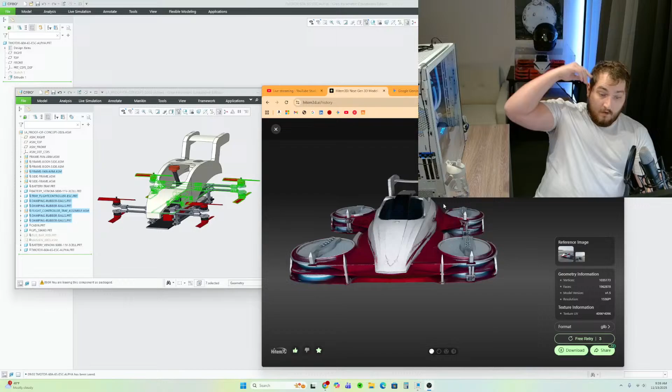I'm back. I'm just gonna check if the sound's good, because right now it looks like it's too loud. But let me just make sure the stream's good before I start talking. See, I got the live stream on my phone. Alright, perfect. Alright, sound looks good.

Let's get started. I'm CADing today. I was developing in my previous streams, but I decided that I want to. Well, I should backtrack because I started going to a hackerspace in New Jersey, and I brought motors, which I'll show you. Hold on one sec. They're big. Hold on.

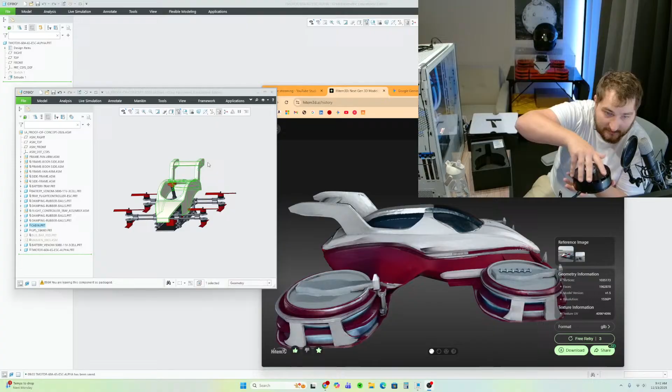Okay, so you power them here with a 3-phase PWM controller, which is what the ESCs are, through a flight controller, which is this right here, this flight controller. But this is a small scale. We're building it small first to make sure that what I'm trying to do works on a small scale before we scale up. But in the future, we will be building this in a human flight capacity. So let me just put this away.

Okay, so that's kind of the backstory. I've been going to a hackerspace. I told them, hey, like, can I build the large scale here? And they were like, yeah, absolutely, it's gonna cost like $110 a month to keep the lights on, which is better than paying for like a $300,000 facility on my own. I could just share it, and it's like a business there, so they make money and they're able to pay for the building. This is kind of the stuff I think about. I know it's probably not interesting to you, but

I was like, can I build it here? And they were like, it's up to you if you want to start right away, or if you want to build like a small scale version to demonstrate that it works to investors, so that we can get like grants from the state to sort of fund the project. Like I have $20,000 worth of components, but we still need the frame, the batteries, and the frame and batteries alone are probably in the range of $10,000, I would say, maybe a little bit more.

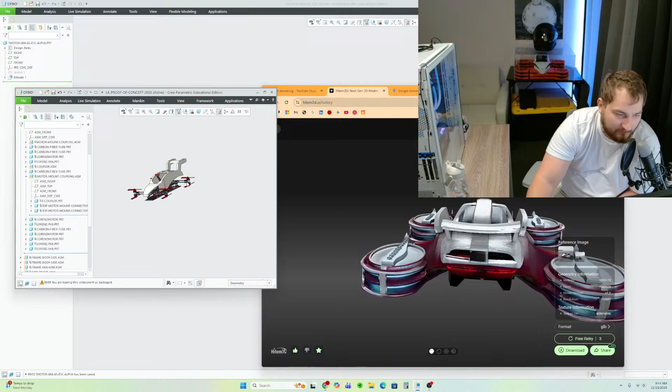Depending on how we make these parts right here, this for example, if you run this through a milling process like PCBWay, they'd probably charge you like $300 or more just to make this part. And I have a lot of those parts. As you can see, this frame is made up mostly of those parts. So if we get the materials on our own and like buy a CNC machine that the state funds through the grant, I don't know how much CNC machines cost actually. I should probably look into that. How much does an aluminum CNC machine cost? This is probably something I should know. Isn't it great? Like, AI can just...

The cost of a CNC machine varies dramatically, ranging from a few hundred for a hobbyist desktop model to $500,000 for a high production industrial machine. The price depends on the machine's size, rigidity, precision, and features. Here's a general breakdown of what you can expect at different price points. Okay. I would say between like a desktop CNC and entry-level industrial. 4x8 foot CNC routers with enough power and rigidity to handle aluminum sheet production. Prosumer or desktop mill range.

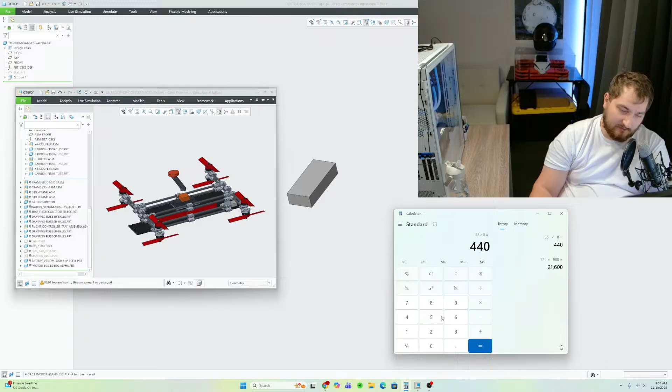So yeah, let's work on it, because there's a few things that I need to do. For example, I figured out that I need 2 batteries because there's 8 motors, and each motor has a peak current of 55 amps. So 55 times 8, 440 amps. So one battery can't contribute all of that necessary power. There would be a voltage lag, and Aeroboticar's small scale prototype will fall out of the sky if I use one battery. So divide that by 2 batteries running it as 2 separate systems, so it's a redundant power system.

So this battery right here will be powering these 4, this motor, this motor, this motor, and this motor on this side. And then this battery, actually, now that I think about it, it can't be like that. It has to be, this battery powers the bottom ones, and this battery powers the top ones. This way, if one battery fails, the drone won't fall out of the sky. It will still have 4 of its motors working.

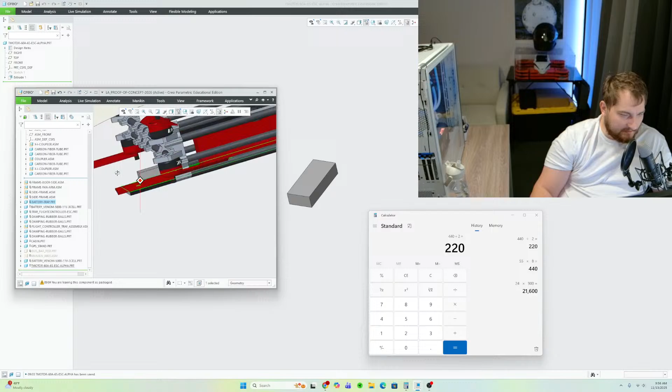So the problem right now is space, because as you can see, I can't really go out any further with this battery tray without it looking stupid, and I do want to make it aesthetically pleasing for investors. So what I'm gonna have to do is, I could probably move this in a tiny bit further. Okay. From the battery, distance, how far should it be?

Oh, I'm lagging. I wonder if it's because I'm streaming.

I wonder if it's because I'm streaming. Yeah, it's because I'm streaming. I'm like lagging a little bit.

I think that's inches. I could probably keep it tight because I'm gonna need bus bars here. So keep it tight, keep it right. And then from the center, I want to make sure that they don't overheat or anything. You know, they need some breathing room. Keep it tight, keep it right.

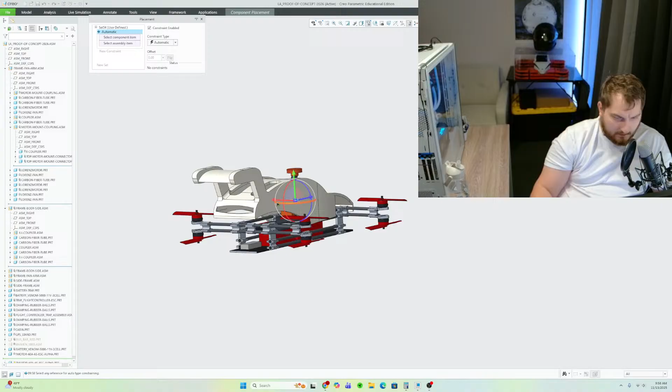So this is the flying car, huh? Yep, this is it. This is the flying car right here. I've been working on this for 7 years to finally get something to fly, with the goal of making a full-scale prototype. And this scales up to human scale. So this is something that I'm very, very proud of.

Normal. No, not normal. Sorry. Come back. Distance. Keep it right, keep it tight. Alright. 0.4. Okay. And this gets... So right now I'm just constraining. I don't think it's registering that I'm trying to constrain it on the ground here. There you go. Okay, now it's fully constrained.

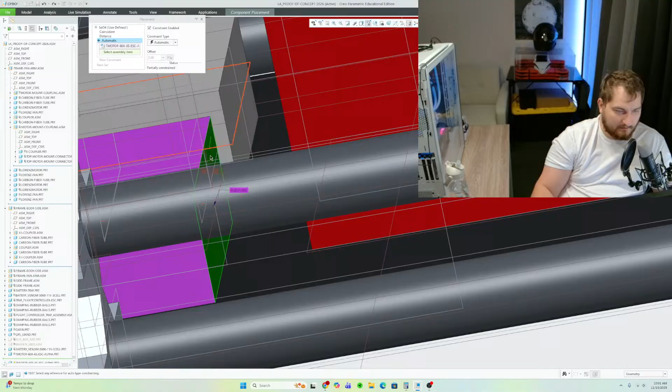0.4. For some reason it's not... maybe I shouldn't constrain it with respect to the other ESC. I should do it with respect to the same thing I did with the first one. Okay, so now there's just one vector left, and I think I did it with respect to the battery. I think I did like 0.5 inches from the battery.

But it's not constraining it. The blue line should go away, the blue vector. But it's not. And this whole thing should turn orange. Maybe if I do it with respect to that. No. Alright, well, that'll have to do. It's not working. But that kind of demonstrates how it's going to look. And then wires will be coming out of here, and the battery will also have wires coming out of it. So there's going to be 8 ESCs total.

This is just the engineering process. It's very meticulous, sort of. There's no real calculations that I've had to do. You haven't seen me model anything so far. I'm just kind of assembling things, but see how it's orange? Oops. Keep it right, keep it tight. So that's perfect, actually. That's really good news, because now I can create a sort of platform for the ESCs with some breathing room. They might get hot in here, not gonna lie.

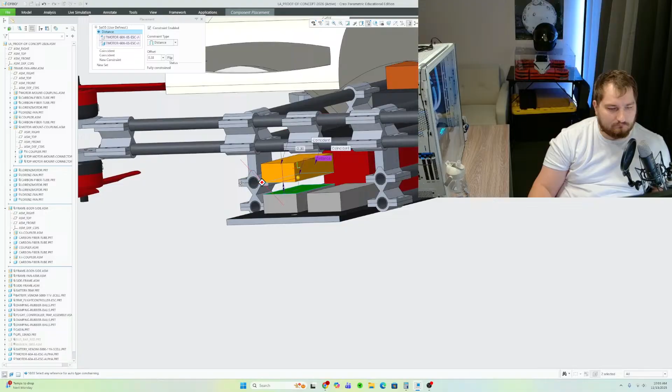So a lot of electrical noise going on in here, but these are D-shot ESCs. I'll show you the ESCs. I don't think I've shown you those yet. T-Motor Alpha 80 amp ESC. These ones right here. 6S. So this is going to be like a $500 expense because I need 8 of them. So $559 that I'm going to spend on ESCs. But these are it. And this is how I got the dimensions. They literally give them to you.

Lightweight design on the promise of waterproof, dust resistant, and cooling performance. Lighter than square wave ESC of the same size. Alpha ESC is 15%. Okay, cooling performance. So these are probably going to be okay because they're very efficient, low temperature. So I don't think I really have to worry too much about them overheating or anything like that.

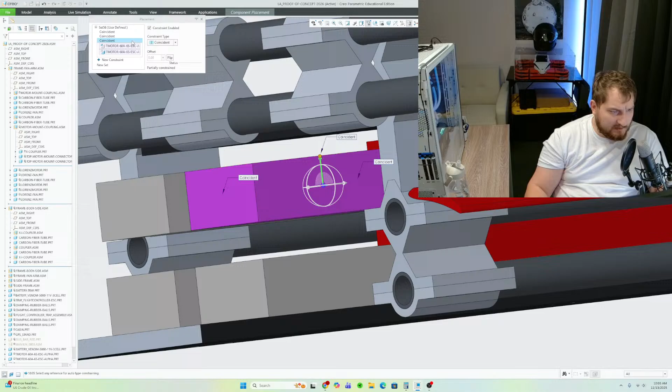So 3D CAD is kind of like creating the Lego manual, if you've ever played with Legos. See, sometimes it constrains and other times it doesn't, which I don't know why. There you go. Distance 0.4. Perfect. The bus bars will have to fit right here. I have to create a bus bar. But yeah, I got super lucky with the dimensions. I literally want these dimensions, and the ESCs just so happen to fit. And then I need bus bars as well.

So this little hole right here. So a bus bar looks like this. You could plug power onto this, and it's like a rail for your electronic speed controller. This is the positive one. There's also a black one that I was gonna put on the back. That's the negative terminal. And this took up a lot of space. So instead of having 4 individual poles, I'm going to create one pole.

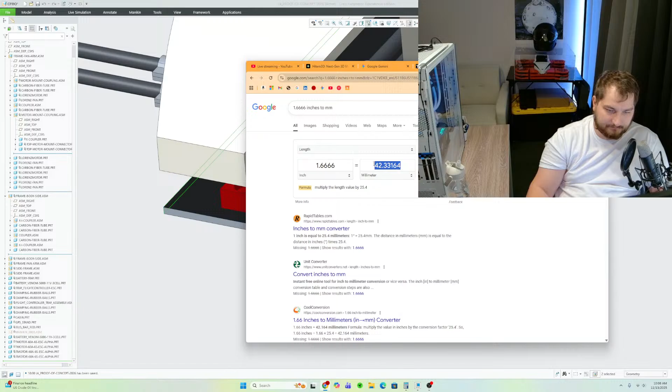Actually, 42 is the meaning of life. If you guys didn't know, if you've ever seen Hitchhiker's Guide to the Galaxy, 42 is the meaning of life.

So let's do 42. 42 divided by 2. And then we can get rid of these right here. Actually, yeah, we can. Okay, delete that. We can delete this. So now we're just left with this little thing. So we're gonna need to put an M8 bolt through it.

So I like to start off very crude and rudimentary. So for example, what is the size of an M8 screw? That's what I need to know. M8 bolt size chart. The diameter of an M8 is 8 millimeters, and a standard or coarse thread pitch. 8 indicates the nominal diameter. Okay, so it's 8. That's why it's 8. M8, 8 millimeters. So we're going to need about 8.2 just to make it fit.

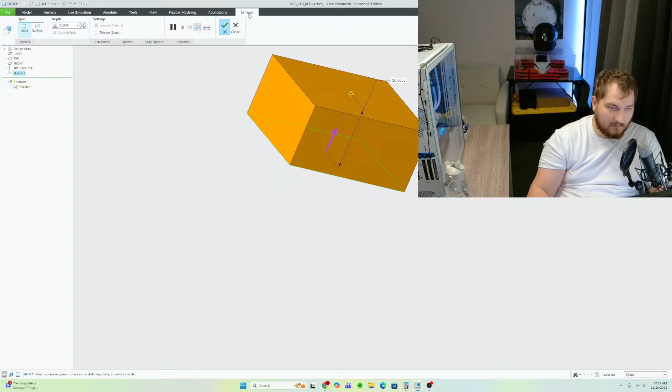And then you kind of just extrude it, remove material, and that's sort of the compartment for it. 10 is probably plenty of room. And then I'm just going to move this up a little bit, maybe 20. Okay. So the bolt will go in here. Let's model a bolt.

M8 bolt. Illegal characters. Inches part solid ABS. So this bolt will be, I don't actually know what size bolt, like how big the head is. Let's call it that big.

So this is gonna be 8. Let's do 8.1 just for tolerance purposes. And this is the fun part, because we need to figure out how much space we have under there. I'm guessing we probably have around 40. Save it, and then we can make it copper. Copper right here. So it's gonna look copper.

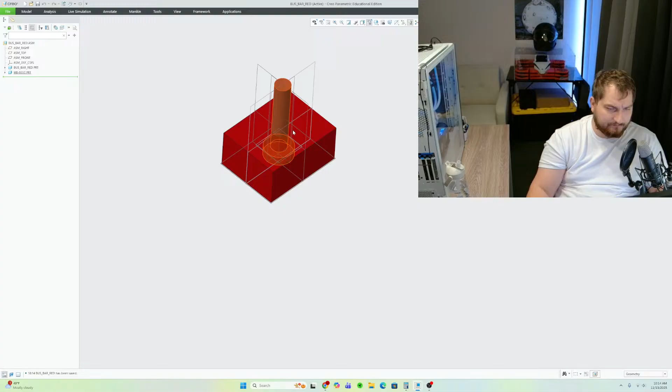So let's go back to our Aeroboticar. And now let's add the, what did I call it? Bus bar red assembly. And then put it over here. Okay. Oh, okay. I think 40 might be the limit. 40 might be actually the limit. We could delete this. That's just the base of the bus bar.

So as you can see, we could probably take this and make this like 14. And I'm just making sure that, so I want to give it space, right? I want to make sure that the distance from the head of the copper bolt to the bottom of the container, I shouldn't have named it container, but so that it's not touching the ground. Okay. And we can paint this red. Okay.

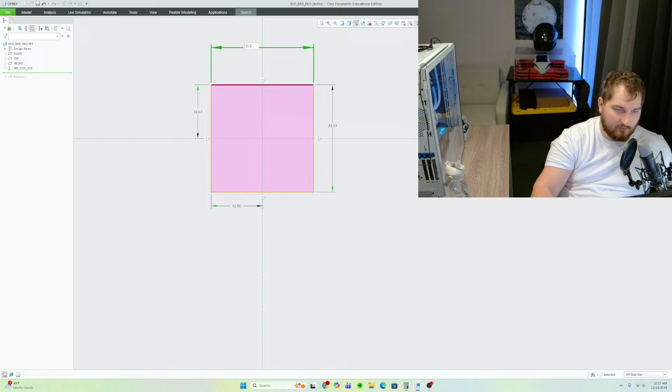This is going to be 3D printed in ABS plastic. So now we can take this and create holes for, I'm going to say M2. M2 screws can hold this for sure. And I think I'm going to make this square, because right now it's 42 by 33. You know what? We could probably get away with 33. 33.333 divided by 2. Okay. So it makes it more compact.

And then we're going to need screw holes on this. So let's see here. How can we do this? Just outlining the circle. We could probably put a hole right there. So this hole is gonna have to be about 4. Actually, no. An M2 screw is 2.2. Okay. So this is going to be mounted onto the battery tray. So we can do that.

Put a hole through it. And then mirror this. And then mirror these two over that. So now we have 4 holes. And this is going to be mounted from the top. I believe it's going to be mounted from the top.

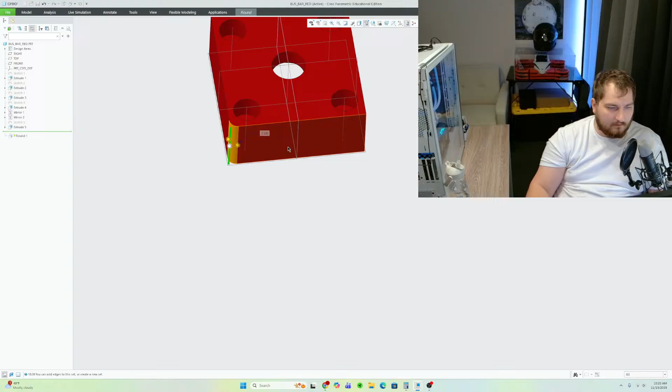Paint it red. Okay. So now you have your bus bar. And we can get rid of these sharp edges. Like that. And the 3D printer will take care of the rest. There's your bus bar mount. Bus bar red. Okay. And then let's make sure that it fits. See, we made it a little bit smaller. Okay.

We could probably get away with just screwing in 2. You know, I made 4, but I'm thinking now we could probably get away with, I think 4 might be too much. Yeah, I think we could do 2. Because then I'm going to be sitting there screwing all of it in, you know. Actually, we can't do 2. We can do like a diagonal situation. I'll just leave it as is, and then when it comes to actually assembling it, I will only use 2 holes. This way, when it 3D prints, it will actually use less material, and it will look neater.

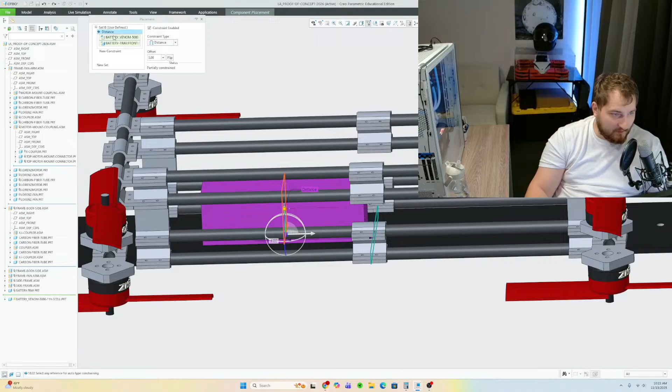Okay, so we got our bus bar. Actually, we should probably put this on the other side, over here. That's where our ESCs are. That's cutting it a little bit too close for my liking. Yeah, that's a little bit too close. However, I could probably get away with 2.5 here. Actually, no, not 2.5. 2.63. I'm just trying to make it so that... 2.69. The batteries will essentially have to be touching each other.

Pause. 2.69. No, that can't work. 3. 2.8. And let's try to do 2.8 here. Okay, so there's barely any room for the batteries to move around. They are going to be strapped in. Now, that doesn't really give me any room to play with here. I guess I could do a little bit. Actually, what's the distance? I could probably decrease the distance a little bit. Maybe like 0.2.

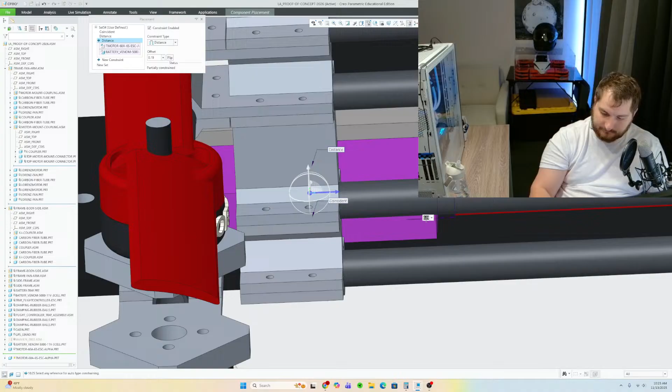And then I would have to... oh, this one came first. Point two. Okay. I don't think that's good either though, because there's wires coming out of here, you know? So they're going to be smushed up against this battery. So we kind of have to undo that and give it some room for wires to come out. 0.5 is fine. Why are these so far back? Distance 0.5. Okay.

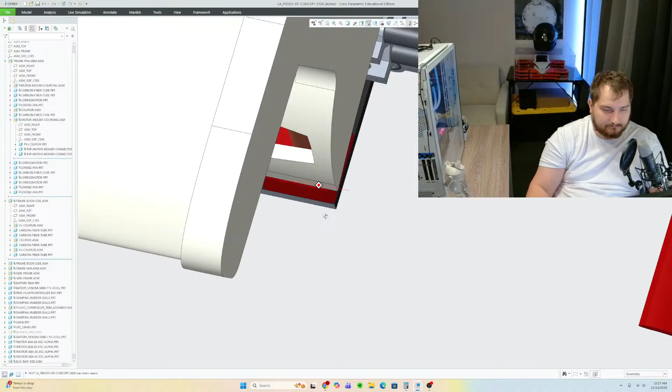The thing is, I think I'm gonna have to put this like on the edge here. I think if I put it on the edge, it should be okay. Oh, wait. If I put it right on the edge, like that, the wires should be able to breathe here a little bit. And these are power wires, so there's only 2 power wires coming out from here. And they should be able to sort of come out and breathe. Okay. So now we need to make holes for this thing. So from here to here is how much? 0.18361.

You know what? I could probably copy and paste. If I take this and take this guy, put center line, put whatever those are, go like that. C, copy, go onto the battery tray and paste it right here. Ratio is 1. The thing is, I don't know. I don't think that'll work actually. But you guys get what I'm trying to do, right?

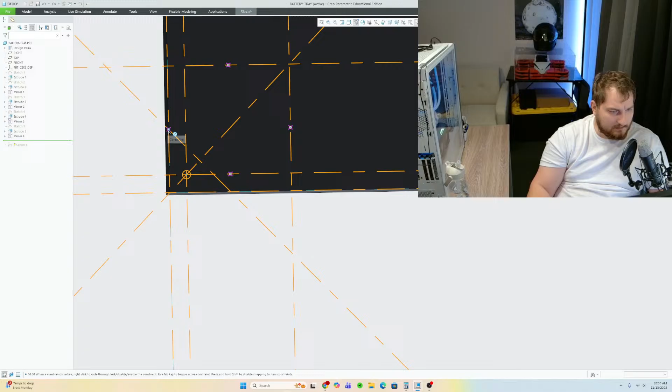If I take from here to the edge, you know what, if I do this, create these lines. I wonder if that will work. Paste. And now this gap right here, I wonder what will happen. Oh, that actually worked. Let's go. Nice. So that will be sort of the holes for the screws. And then I'm gonna need to copy these holes. I believe that's the center line. I don't think that is though. Huh.

I think I did this wrong. Hold on. Cancel. I think it's like that. Oh, so those are the center lines. Okay, so take this, mirror it over this. Take that, mirror it over that, and then take that and mirror it over that. And I believe that should be okay. Those will be the mounts for the... oh, and we need like screw hole little things for it. So like that and like that. Like that and like that.

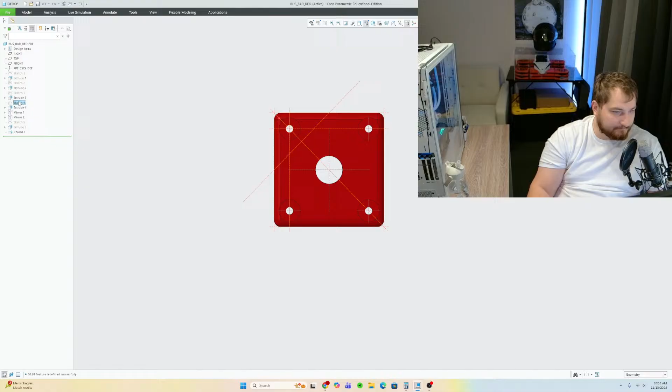This should be like, wait, why is this 2.3? It should be like 3 or maybe even 4, honestly. Let's do 3. And then remove material. These holes are too small though. You know what it is? I don't think I ratioed it when I pasted it. Yeah, I didn't ratio it. That's why they're so small. Okay, hold on. I forgot to ratio it. Remember when I did this whole thing? I forgot to make it 1:1 scale.

So let's go over where that is right now. So it's right here. Oh wait. See this? I didn't do that. From here to here should be 0, and from here to here should be 0. Okay, and then this and this are this, from here to here and from there to there.

Okay, so now we just have to mirror this again. And then mirror that over this and mirror that over this. Mirror. Okay. And then go like that. And there you go, there's your holes. So now here, yep, it's perfectly aligned.

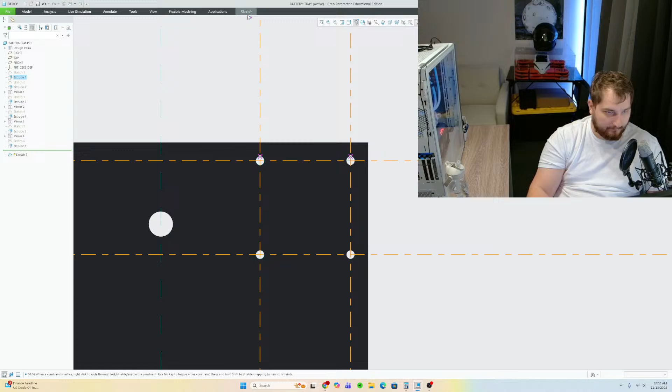We just have to create the little, you know what I'm talking about, the little, so that the screw's not sticking out, like a little compartment for the... probably like 5 is good. It's gonna be tight, but two. Get it right, get it tight. All right.

Now we can take this guy, and this guy, and mirror it over him. And now we have the same pattern over there, and then we can take this guy and mirror it over this guy. So now

I can take bus bar red assembly, take the axis of this little hole right here, constrain it onto the axis of this little thing. Coincident. Okay, and then constrain it like that. So now I have bus bars on either side, and I need black bus bars as well.

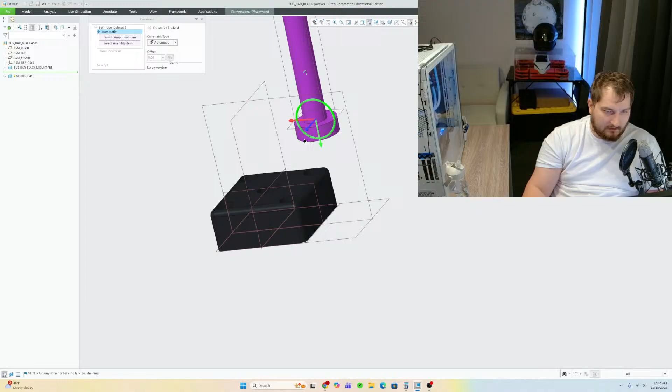Okay, and then we're gonna need our bolt, M8 bolt. I remember the name of this guy, which is upside down right now, so we have to spin it and then put this guy here on this axis. Coincident. And then coincident that again. Okay.

And then, actually I'm gonna need the axis, and then we're gonna need to put bus bar black, put this axis right here, coincident, and do this right here. Okay, so now we have two terminals.

Should negative be on the left or right with respect to the person looking at it? I mean, they're clearly labeled, right? You know what you could also do is get like a... I guess we'll worry about that later, but I'm gonna need to make a cover. Can you guys even see? Let me see. Yeah. I'm gonna need to make a cover for these so they're not just like sticking out.

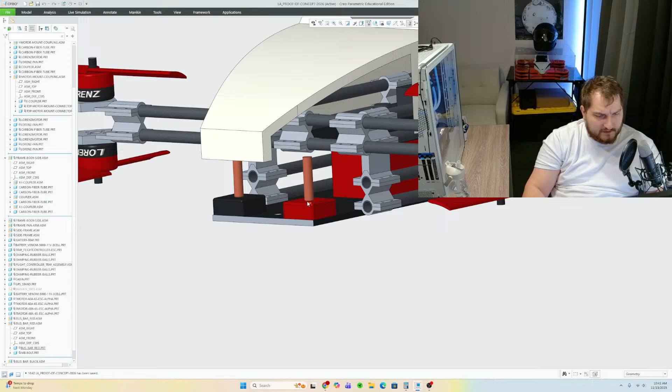But we can also make these bigger, I think. I'm not going to though, just in case I need to put something here. So that should be fine for all the 4 motors, which I'm gonna have to wire like a power cable through here. Okay, so that's what it looks like so far with the bus bars.

And I'm also gonna do like a shelf. I don't know how I'm gonna do that though, if that's gonna be a separate part that I'm gonna mount on, but I could probably... I'm thinking.

Oh, you know what I'm gonna need to do? I'm gonna need to create clamps for these ESCs. This guy does not have mounting holes that I can screw and hold on, so I'm gonna need to clamp it. I'm just thinking how I would do that. And then that clamp could be the shelf for the top one, which will also be a clamp. That's a good idea.

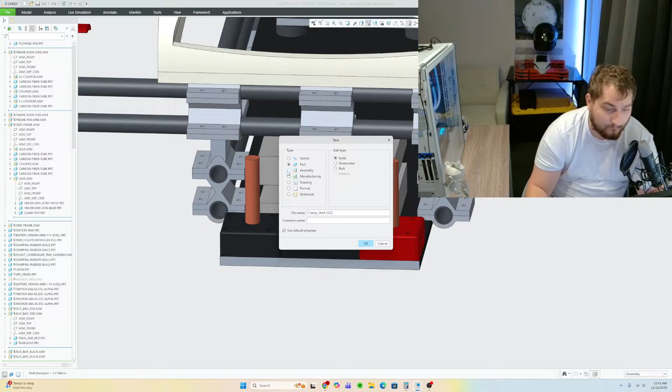So I'm gonna need to make a clamp shelf. Clamp shelf. Clamp shelf ESC part. Clamp shelf ESC Lorenz. Part solid ABS. Okay. So, like a clamp shelf type thing. So, we need a rectangle. Like this kind of. This is gonna be.

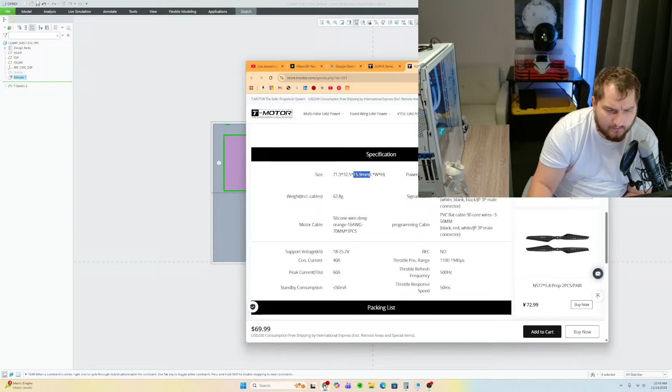Okay, save that. And now it's gonna look something like this. How big is the ESC again? 72. Wait. Oh, no, that's the width. Okay, hold on. 33. And then I'm going to center it. Okay. I'm gonna center it. Okay.

33 from here to here is 33 divided by 2. The height of this compartment is gonna be 16. And then from there to there, I think it's gonna be 2. From here to here should be 2. It is. Okay. Yeah. So, and then take this whole thing and mirror it on that, and then mirror those two over that. Okay. And these will kind of be like the clamp shelf situations. What color should I make it? Let's make it white.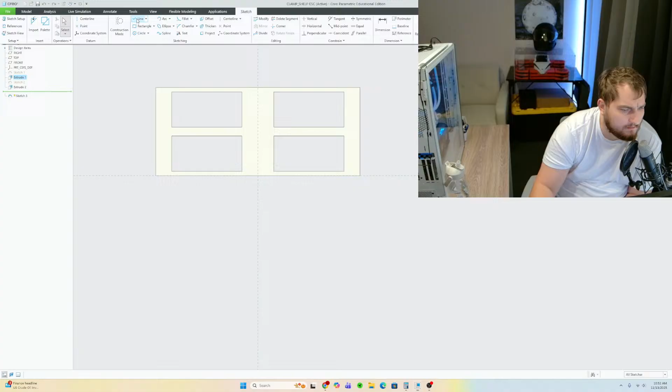Okay, so now, actually, we don't need this bottom part because that will be on the ground. Oops. So from here to here, here to here, here to here, and then like this. Why didn't that work? That's weird. I'm just gonna do it a different way. Do this. Do this. Okay, and then extrude.

Okay, so now that would kind of be your... This wall probably doesn't have to be that thick. So for this, from here to here is how much? 7.5. We need it to be 2. 7.5 minus 2 is 5.5. So from here to here plus 5.5. And then we could take this guy and make it like this too. No, actually, I think 2 should be enough. Okay, and then from here to here, here, pop.

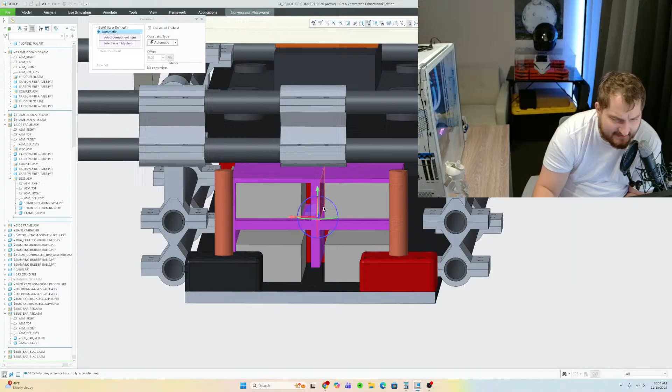Pause. Right here. Get it right, get it tight. Get it right, get it.

Okay. Well, that would be your ESC sort of shelf, like clamp situation. The good news is that it does fit. Now I'm gonna need to create like an assembly file for this. Because I'm gonna need to mount this thing onto this thing. So I'm gonna need to create like a little shelf so I can screw into, just like we did here with this thing. We're gonna need to make like a platform for the screws to go into. So let's start there.

So this guy could go like that. I'd say about 3.333333333, and then we just need it to be big enough. We also need it to fit. So the screw, I'm thinking like 8. Okay, so we're on this side. Okay, so that will fit. Thinking like 8 will fit. And then we're going to need, how many screws? How many screws do we need?

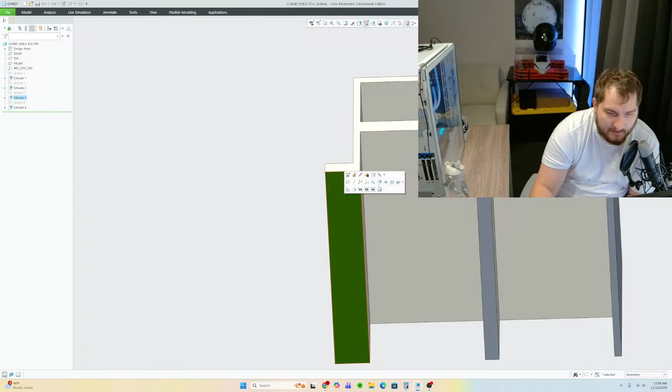Wait, what? Partially placed. You haven't specified enough references? What are you talking about? Can I put, or no? Section is incomplete for reasons listed in message area. What are you talking? This never happened to me before, ever in my life. Maybe I can't sketch on that. Maybe I can only sketch on this part. That's so stupid.

Maybe someone has evil eye towards me or something. I don't know.

Here's the center line. And then I'm thinking we probably only need 2 screws on each side, you know? So from here to here, I'm just finding the center line, which is this right here. And then it's going to be secured by M2 screws, so 2.2. And then the center line will be, yeah, and then mirror this. Mirror that here. Okay. Okay.

Then we could, why can I not sketch on this? You haven't specified enough references to place the section. Sketch anyway. Yes. To select the object, hold down Alt key. Can I sketch on this? Yes or no? I'm so confused. This has to be like 5 or so. Oh, I can sketch on it. Okay. That was weird. I've never had that happen before.

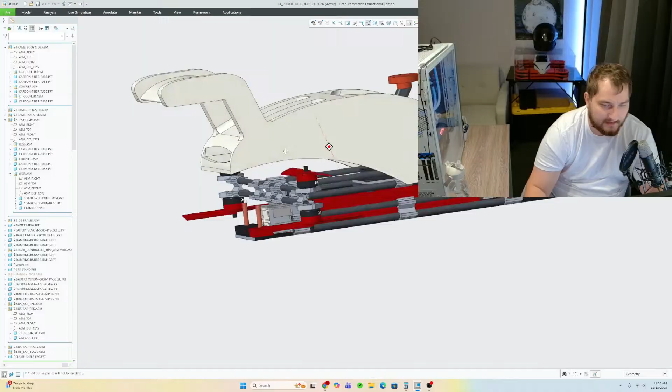Mirror this entire thing over here. Let's see if that fits. I'm getting so lucky with these dimensions, bro, because I already did the cabin, which I just realized needs a window. Actually, does it need a window? This one doesn't have a window. Yeah, I guess it looks fine how it is. But it should have a window, bro. I feel like it should have a window. Hold on. I'm getting off on a tangent, but this needs a window.

Let's get some dimensions going here. Oh, nice. Okay. Oh, wait. Spline. Okay. Get it right. Get it right. Something like that. That's a pretty good window. Pretty good window, right, guys? And then just remove material.

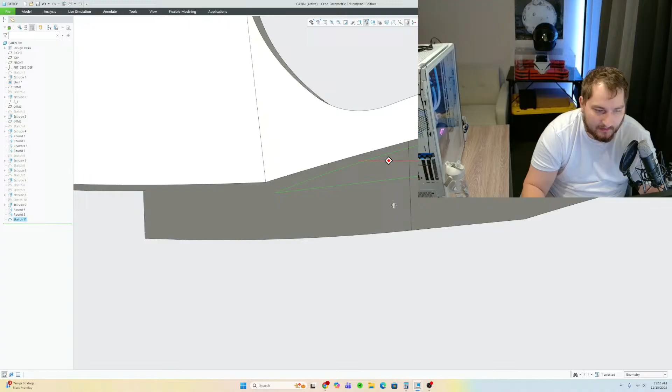Wait, what? What? What? Why is it creating like a wall? What are you guys doing to my application with your evil eye, bro? You know what it is? I think it's because this guy... Oh, I know what it is. I think... Let's do symmetry, remove material. Huh, that didn't work. I wonder why it's doing that. That's strange. Is it because this is not a flat surface?

Let's take this guy. Oh wait, no. Take this, copy. Let's put it on the center. And now we should be able to extrude the material. Why is it doing that, bro? I'm gonna try one more thing. If this doesn't work, I don't know what will.

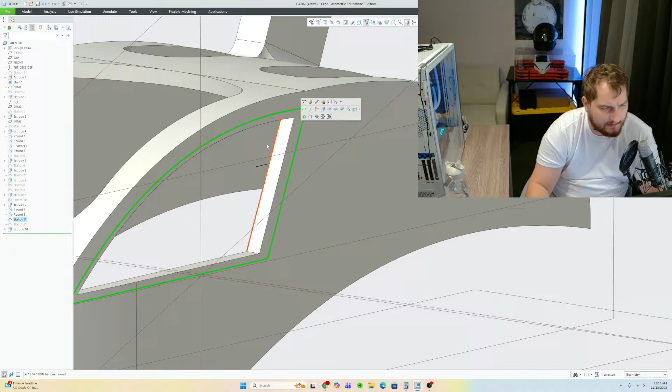Let's do 0.8, or no, 0.9. Paste, sketch, remove. There we go. There we go. Windows. Oh, no, not gray. White. I'm making it white because that's the printer filament I have. So now it has windows. Okay.

Okay, so now back to the clamping situation. The clamping situation. Let's see. Okay, that fits. And then this piece right here will clamp the bottom two. And then this top piece right here is going to need to clamp down onto something as well. So this part down here is going to need to be rigid. Same idea as here. So they're going to be, I don't know if that's a good design though, because it's kind of holding itself against. I'm thinking we could probably get it right, get it tight, you know what I mean?

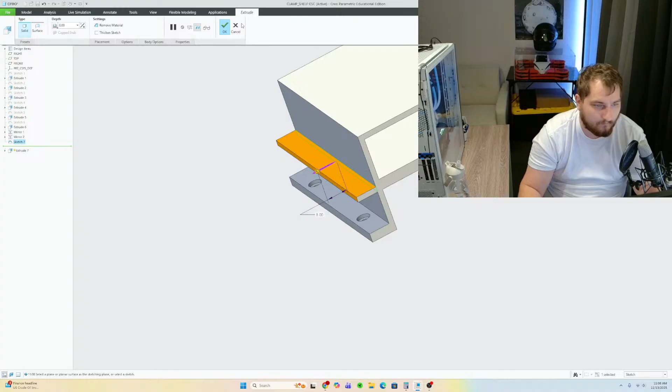So this was 8, and then I'm gonna need to create like a little structural support here. It just needs to be like 10. Actually, no, probably 20. Okay. So see there, it will be like a little. This is probably way too thick though, because that's gonna take forever to print. 8 in thick. You could probably do 8 and then create like a cutout. Like that. About 2. I would say 2 or 3. Maybe 3. And then cut out like that. And we could probably get away with that.

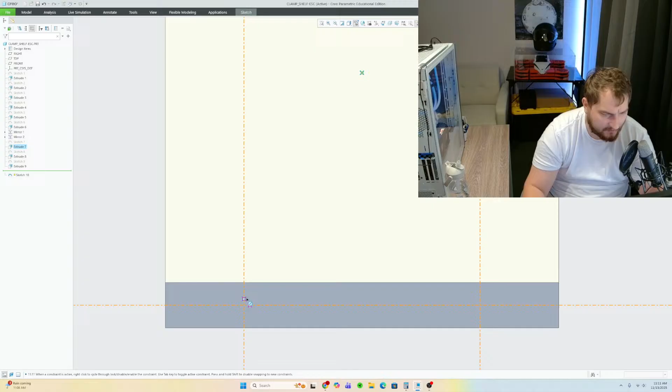Okay. And so this way you're not printing too much, you know? You gotta save some space so you can make holes in certain places that won't ruin the design or anything like that. But this should probably be like 1. Okay. And then if we print on top of that, we could find the holes that we already made, which is this one right here, and create the same holes for those. So that would be sort of the platform for this guy.

So let's copy all that. Over here. Mirror it. Does that still fit? It should, yeah. Okay. And now we're gonna need to make 2 separate pieces. So this is a clamp shelf ESC bottom. So let's save as a copy. Clamp shelf ESC top. Open clamp shelf ESC top. And then

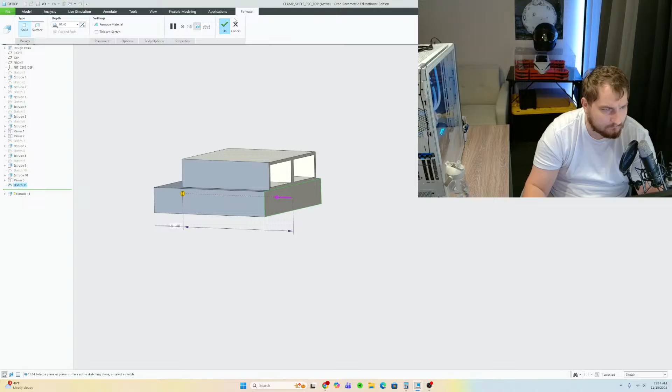so we can get rid of all of this. Actually, if I get rid of that, I'm gonna have to redo. Yeah. Gonna have to get rid of all of this, as well as this right here.

Keeping this right here, I think. Actually, I think we need to get rid of this, not keep that. Okay. Get rid of that, get rid of that. Delete. Okay, so that'll be the top, and then we can make an assembly called ESC clamp shelf.

And then we're gonna have to model clamp shelf, ESC clamp shelf. This guy. And then these will be two separate pieces. Okay. Clamp shelf, ESC top. So that'll be the top of it. I just need to fix this up real quick.

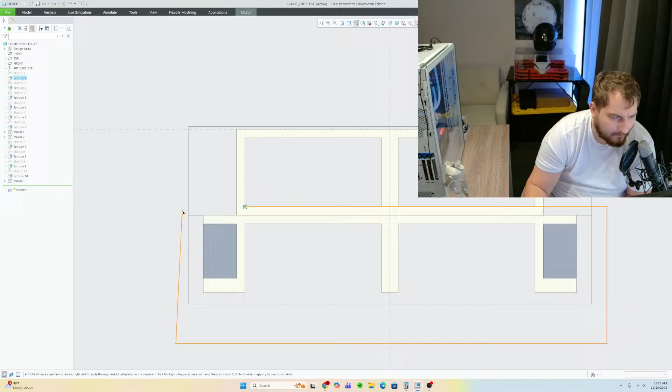Okay, so we're getting rid of, well, this whole top part. This whole top part is getting deleted. Oh wait, top part, not bottom part. So, okay. Actually, hold on. We could probably get away with making this thinner. Like that.

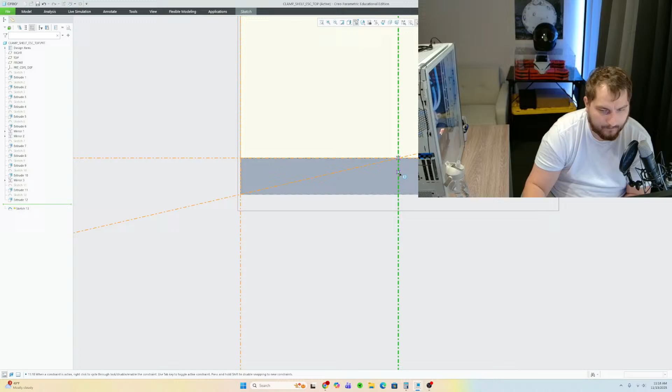Okay. So these will hold the bottom two ones. They'll clamp them down. And then this guy will be clamped. So we need to make a, like this. Two. And then just like before, why is it doing that, bro? Okay, just like before, we're gonna need to find the center. Which is right here. Make a circle with 2.2 hole. Mirror against that.

And then five. And then take that entire thing and mirror it. Okay, color it white. This guy can be white as well. Okay, and now this is the clamp for the ESC. It probably doesn't have to be. This has to be flat for the entire ESC, for the top ESCs. But I think we can get away with making the top one less material to cut down on cost.

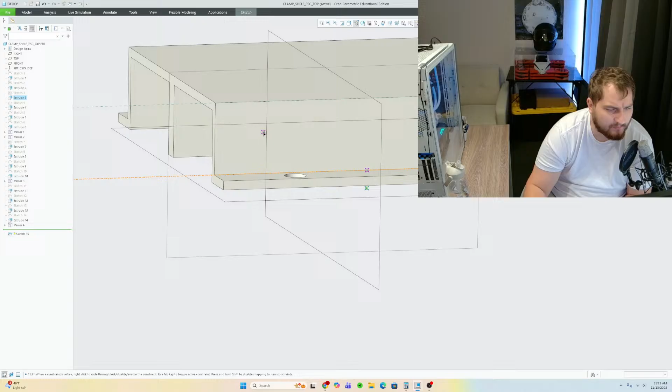So, because how am I even gonna print this? Oh, I know, I'm gonna print it on the back. But I would say you can probably get rid of like that much. So get rid of this. Mirror that. And then we are literally just removing the material. So that way it still clamps, but we are cutting down on manufacturing costs and material costs.

Okay. So this part is right here. Oh no. Oh, I know what I did wrong. Okay. These screws don't align yet, but they will. We just need to measure from here to here. How far are we off? 0.14. How many millimeters is that? 3.6. 3.6.

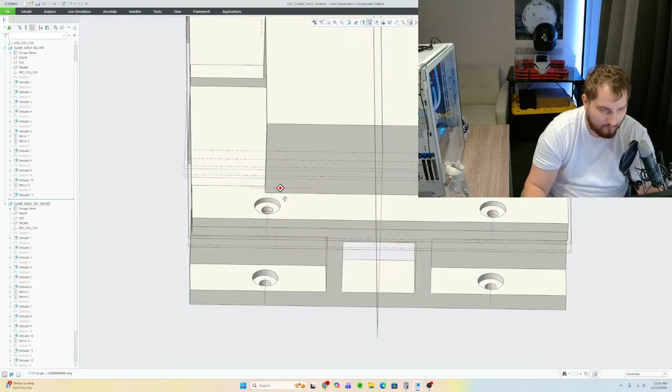Hold on, that's the wrong one. Plus 3.6. Plus 3.6. Okay, they should align now. Yep. Yep, see, they align. Okay. And now the ESCs can fit snugly into this clamp situation type thing.

We could probably get away with more manufacturing cost reductions by creating like holes in the top. I would say maybe like that big. 9.5. 9.5 times 2. And extrude.

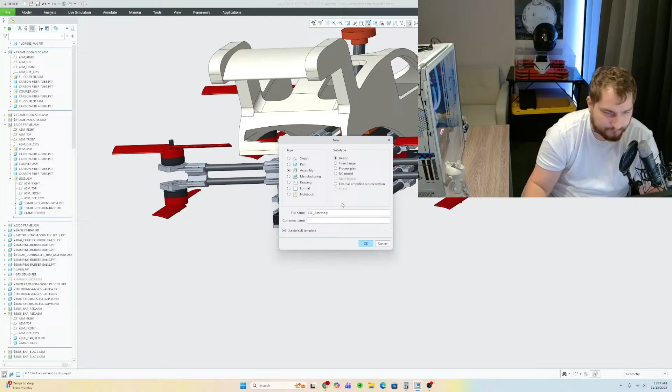You know what we could do is we can create a model. ESC assembly. And then, so we don't have to sit there doing that on the main model. ESC clamp shelf assembly. I think this is that. So I just got to, these are not, oh yeah, they are, they're aligned, okay. Okay. Okay.

And now I can place my ESC T-Motor 60 amp alphas. This guy. It's gonna be pretty tight because it's a clamp and it needs to hold it in place. So 0.73. And then from here to the top, that's a little too tight for my liking.

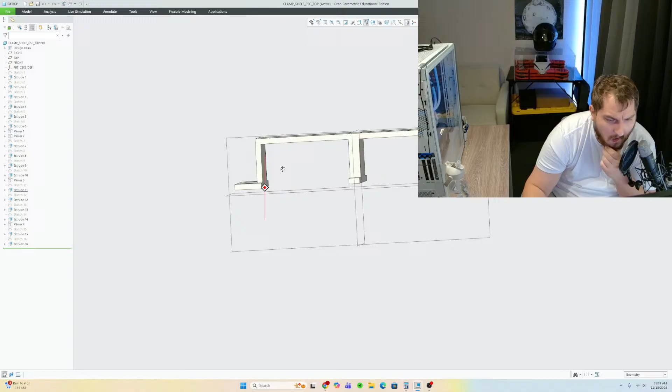But at the same time, I think I measured this 16 millimeters. The actual is 15.9. So right here, 16 plus 0.3. I think that might be a little bit too tight. How would we? Okay. I'm just gonna make it a little bit thicker. Maybe like 0.2 thicker.

By drawing like a little, like that. Can make it thicker by like, I don't know, what would you guys say, like 0.2? This is 0.2, right? Yep. So this actually needs to be reconstrained.

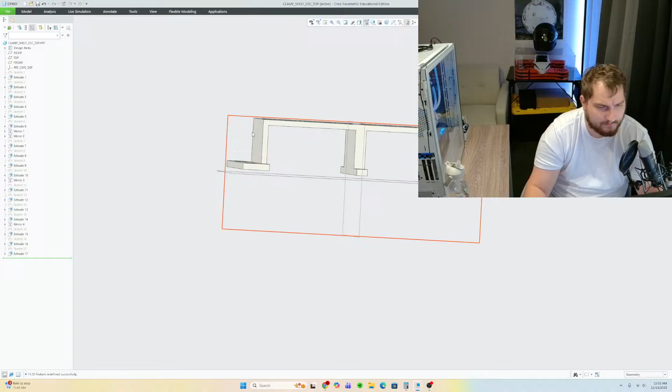So now, as you can see, there's a tiny gap. It says plus or minus 0.3 plus 3D printer tolerances, but I don't want it too loose either, you know. I'm gonna test print all of this, make sure that the assembly actually works.

But okay, I'm just doing a little bit of maintenance work on this, but yeah, now the gap's gonna be plus or minus 0.3, and then the gap on this side and this side are 0.01 inches and 0.008 inches. So hold on, let me reconstrain this.

That gap looks pretty good. I don't want it to be too tight, you know. Oh yeah, these holes also serve as breathing, so it's not suffocating. The bottom ones, there's a hole here and a hole here for ventilation. I think the bottom ones may need a little bit more ventilation though. So let's create some ventilation for it.

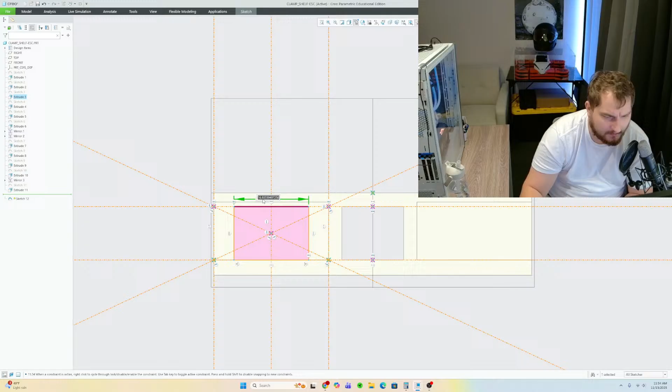I don't know why I'm doing all that. Let's do that. 16. Extrude this way. Mirror here. So this will cut down on cost a little bit. Kind of. I mean, there's going to need to be support material printed through there. But support material is less dense than the infill. So overall, it will be a saving, plus it will be ventilated.

So let's go ahead and add our, and I could probably ventilate it here too, like here and here and here. So create a small opening. Well, actually, I think I should just make maybe like that. 24, 14. From here to here is 5. From here to here is 5. So like 5.5. And then maybe like 8. Let's try with that.

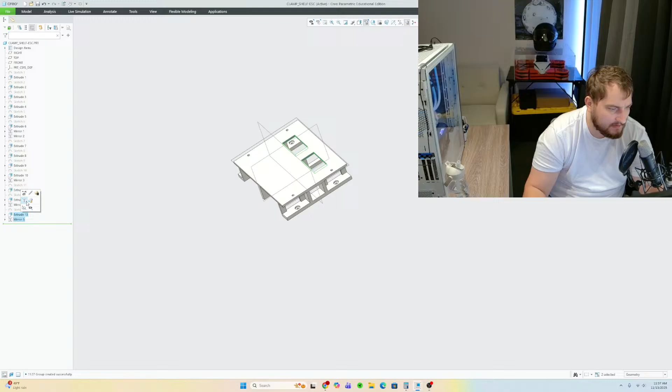And then mirror these on there. And then mirror these like that. So there's a bit of ventilation there. So the ESCs will kind of sit mainly on here. They'll be floating a little bit there. Actually, but yeah, like that. So it will be pretty much okay. So now that it's ventilated, let us add an ESC.

So now I'm just constraining it. And I guess I can put it all the way to the wall. So the ESCs will be clamped down, so they won't be moving around. At least that's what I hope is gonna happen. I might have to put tape on it if that doesn't work, but when I 3D print all this stuff, I'm gonna test it and make sure that it functions correctly. But here, constrain that to the wall and constrain that to the front.

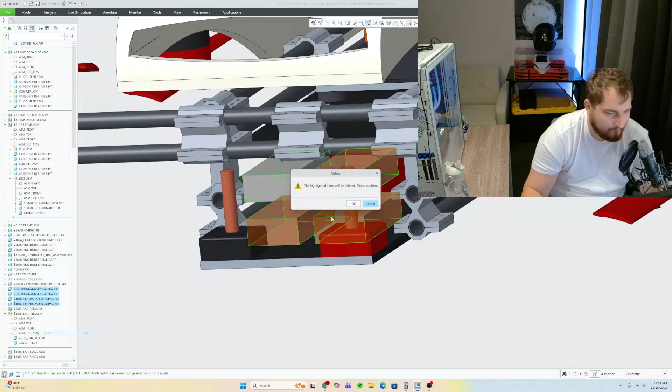One more ESC, constrain it to the wall, and then the bottom, and like that. So there you go. There's your full ESC assembly. This guy could probably be constrained to the bottom. Yeah, that's better. I don't know what I was thinking before, but okay. And now we can get rid of these guys. And add, what is that called? ESC assembly. Oh, and I'm gonna need to make holes for that. Hold on, before I place that, I'm gonna need these dimensions right here.

This is 8, right? Okay. Copy this. Did I copy it? Copy. Control C. Go to this guy. Oh, there's no holes on that side? Why aren't there holes there? What happened to these holes? Well, let's mirror these guys. There you go. Okay. Ratio it to 1.

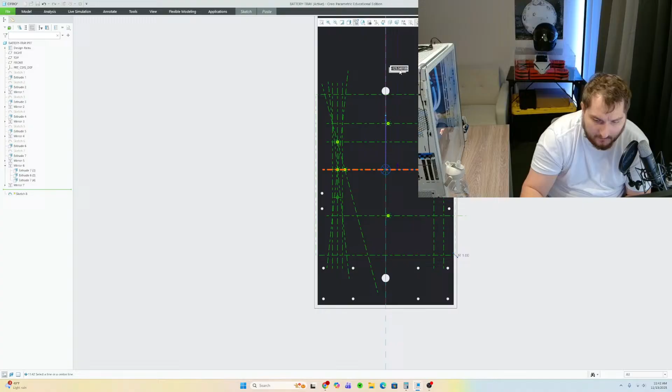And what would you guys say is a good spot to put it? Like right here? Nah, probably like -124 or so. Let's just test it. Let's test if that's a good placement. So add these holes, add this axis right here. Coincident. No. See, that's hitting the battery.

But if we change these holes right here, this guy, 130, probably like 140, or maybe 150. Let's try 150. Reconstrain. It does it automatically, which is pretty cool. Okay. The battery has some breathing room. The cables can safely come out, I believe, but I feel like they need to be a little bit closer this way. Let's do 155. Okay. So the cables will still be able to come out.

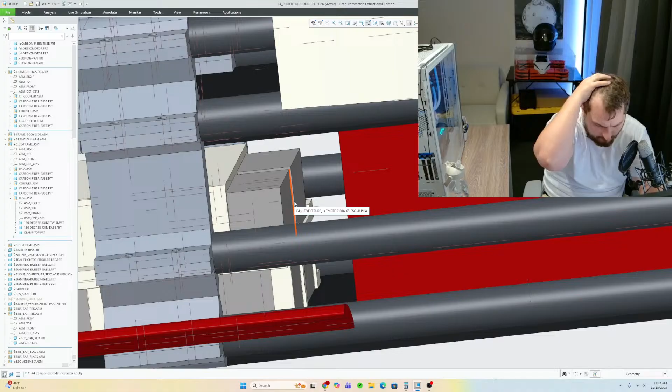The cables on the ESCs, I think that's going to be the motor wires. I think the motor wires will come out from the back, and then I'm going to need extension cables for the data signal from here to the Pixhawk, and then the power cables will go here onto the bus bar. I think that's a pretty good design.

So let's finish making these holes, which is this guy. Actually, let's do it this way. Mirror him, and then mirror him and him over here. Let's just make sure that it aligns. Does it align? I can't tell. It doesn't look like it. Hold on. Let's see, this guy. Huh, that's not good.

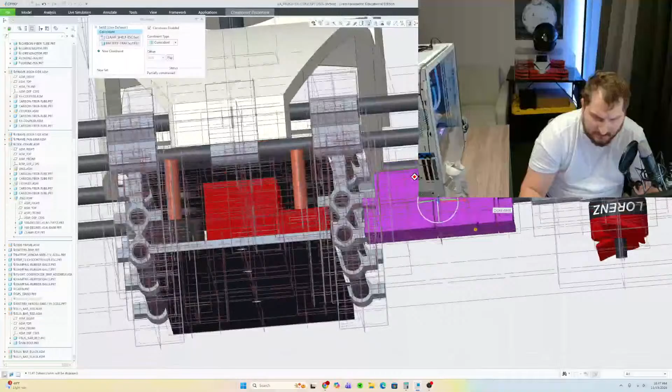I wonder if this guy's centered. Let's center him. Then we'll figure out what the problem is. Let's see, center them on this. Coincident. So the distance from there to there is 0.08. And on this side, it should be the same, 0.08. Which means this guy is wrong.

Oh, I see. From here to here should be 0.08 inches. Which it is, because 2.05 is 0.08. This has to be 0. And then recenter this guy. Hold on, did I save that?

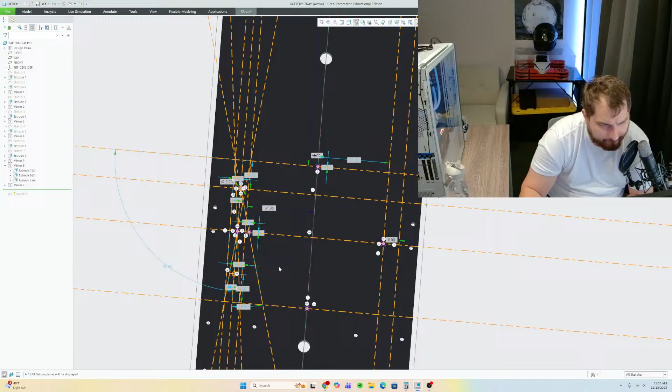I wonder what the issue is. From here to here, what is this? This is 34. Let me see something. This is 34.95, but this is 37. These should be the same. Hold on, let me check what it's supposed to be.

From here to here. Or no, from here to here. What is that supposed to be? What is this in millimeters? 35. So this one's right, this one's wrong. I think that should fix it now. Sometimes I get stuck on a problem like this, but it just takes time.

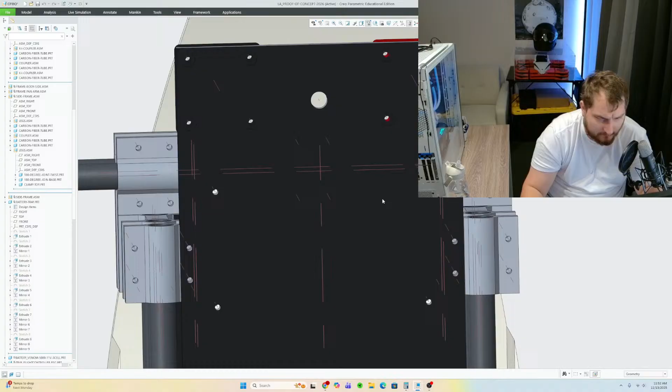What is this? 0.08. And what is that? 0.08. How many millimeters is that? 2. So this is off by 2 millimeters somewhere. What's 34.95 plus 2? 37. I wonder if I just add 2 to this. Okay. That seemed to work.

Yeah, I think that seemed to work because now I can see through the hole. Can you guys see that or no? I'm kind of in the way. And then this hole aligns as well. I mean, it's a little bit off, like a micrometer. But these are not off at all. I wonder why that occurred.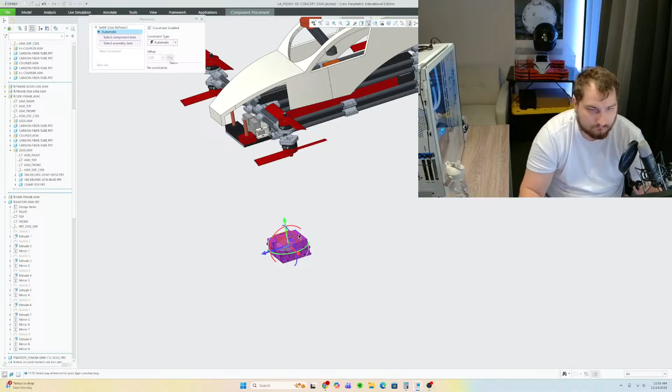Now let's add the ESC assembly. Let's just do it this way. There you go. Perfect. Is this one constrained too? Usually I get like an orientation error or something, but there you go. Nice. Alright, so now the ESCs are in. Let's see. This is what it looks like as like a structural thing.

So the batteries, let's move this assembly too. And this guy. So the batteries are in the center. All the wiring and stuff is going to go through on the sides of the batteries. 4 of these ESCs will be connected. No, 2 of these ESCs will be connected to 2 of these poles. And 2 of these ESCs, the top ones.

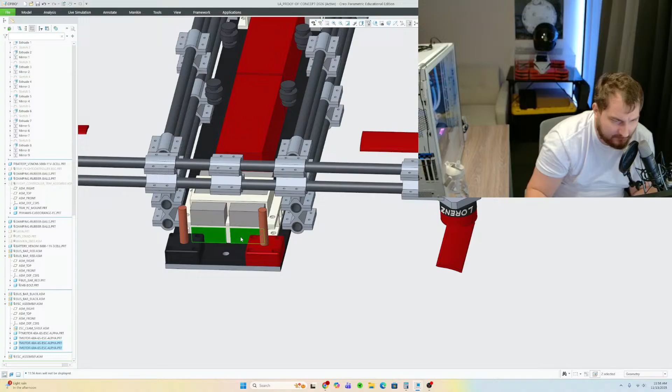So it's literally this ESC is connected to this motor right here. This motor is connected to this ESC. This motor is connected to this ESC. And this motor is connected to that ESC. I'm sorry. No, that's not right. Because if I do that, actually, so that's, I think, like wiring wise, that's what's gonna happen. But then these ESCs down here. No, I can't. I'm confusing myself.

Because one battery powers the bottom 4 motors, and the other battery powers the top 4 motors. So it's a redundant system. If one battery shuts down, the drone will still be able to fly. So it's like a safety system. So these top ESCs need to be connected to either battery, but we can say, for example, top is front because it's like top and front.

Like if you look on the y-axis, the positive y-axis would be the top, and the positive x-axis would be the front. So what's the front of the drone? Where's the cabin at? So the top would be connected to this one. Where's the cabin at?

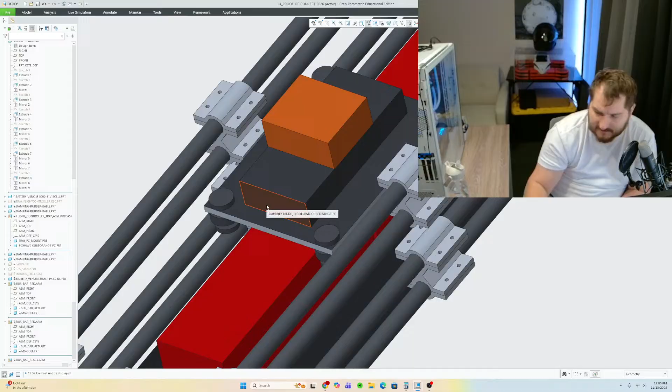if the Pixhawk, right? The Pixhawk tray assembly. The Pixhawk has slots in it. It has like motor 1, motor 2, motor 3, motor 4, motor 5. So I will need to take motor 1. If you look at a diagram, drone motor assembly M1, M2, M3, M4, M5, M6, M7, M8. Images. Software configuration.

This one kind of has it, but I'm looking for the dual axle. Dual axle. This one kind of has it. It demonstrates my point. M1, M2, M3, M4. I don't think that's facts. Hold on. Pixhawk. This one, oh, this one right here. Okay. 1, 2, 3, 4.

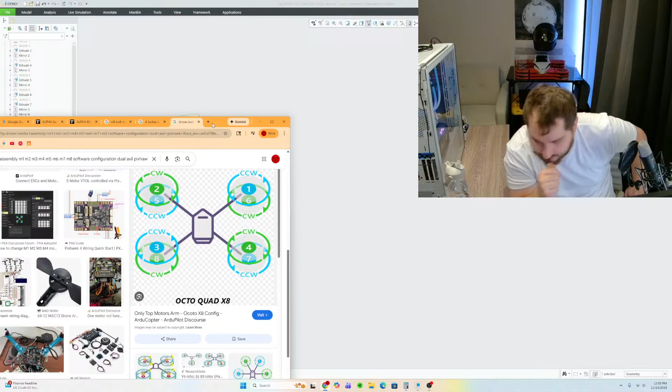In terms of power, they could be connected however they want to be, like the batteries. Oh, you guys can't see. Hold on. This is what I'm talking about right here. 1, 2, 3, 4. See? How do I make this bigger? Positive X, negative X, negative X, positive X. How I was saying.

So this top motor needs to be connected to slot 1 on the Pixhawk. This motor needs to be connected to slot 2. This motor needs to be connected to slot 3. This motor has to be connected to slot 4. And then five, six, seven, 8. So then it goes backwards. So then it goes positive y-axis, negative x-axis is 5, this motor right here. Then it goes positive x, positive y is 6. Then 7 is negative y, positive x, and then 8 is negative x, negative y.

So the slots need to be connected. And then I just have to make sure that that's spinning clockwise, counterclockwise, clockwise, counterclockwise, clockwise. And then yeah. That'll be fun to figure out. That's going to be a whole challenge. I don't know if I'm going to assemble it here or at the hackerspace that I joined. But yeah, that's kind of the situation that's going on right now.

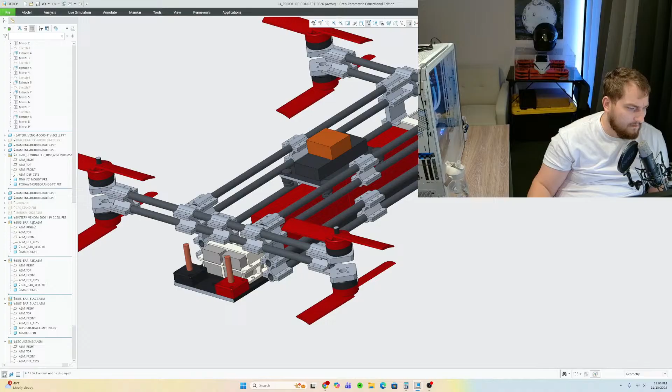Okay, so we got our ESCs, we got our flight controller, and how long have I been streaming? Almost 3 hours. So I think that's pretty much it. I did the ESC clamps, I did the bus bars, I added the battery today with some space to kill, but the wires will be there. What do I need to do next? I'm gonna add LEDs for the headlights. I don't know if we want to figure that out right now or if there's anything more important. But the GPS needs to get figured out, like what it's gonna sit on, because right now it's just floating in the air. So I need to create some sort of shell or tray for that.

We could do that. Let's figure out here, stand for this guy. GPS stand. So I don't know if this has mounting screws on it. 10% off, that's $2. Alright, so oh yeah, it does have a screw in the back and a screw in the, okay. So I need to order this so I can know kind of exactly the dimensions I'm working with, but for now we can create the platform. And this will be kind of the last thing I do for today.

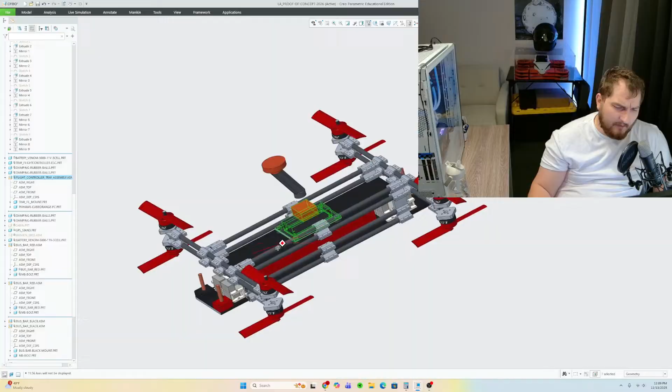But I need to make, similarly to this clamshell thing, I'm gonna put screw holes through it, and it's not gonna clamp the Pixhawk, because the Pixhawk has, I don't know if you guys can see those holes right there. The Pixhawk mounts to this tray mount, and

Well, I'm thinking this whole thing's gonna cost like over $1,000, by the way. Probably between 2,000 and 3,000 in labor and me doing it, all the engineering hours. The cost is very high. The first one, the initial one, is always expensive. That's why I labeled that one back there for 10K. This one's gonna be even more than that, because it's the first one. There's only one of them. Supply is very low. Demand might be whatever. But this thing is very expensive to make. I mean, I'm literally doing all the work to make it.

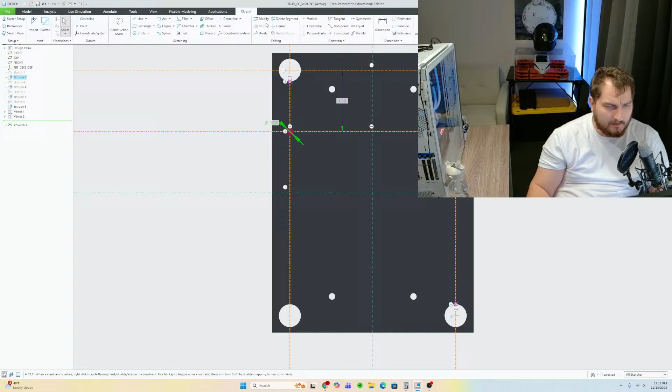Then we can mirror this guy here, and then we can mirror this guy and this guy over this. Symmetric, and remove material.

So now I'm going to create sort of a clamp. It's not going to clamp the Pixhawk, but it will kind of rainbow over it. Pause. So we need to create a new part called GPS mount. And part solid ABS.

And we need the dimensions of this. So let's say it's gonna be yay wide, and let's say it's like that. I'm just thinking right now, I'm visualizing stuff, so there's no real words to what I'm doing in my head. I'm very much a visual thinker. But I want to make sure this is like that.

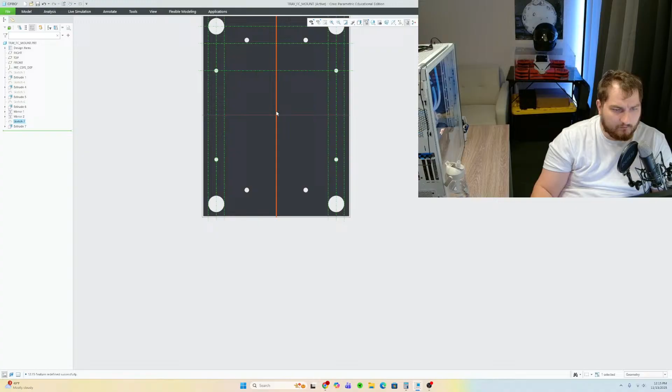So what I need right now is from here to here. I hate when it does that, bro. Puts the dimension all the way down there. 1.59. From the center to top. But that's in inches, right?

.59 is about 3. Convert 1.59 inches. Wait. Oh, it's 40. Why did I think it was 3? Oh, because it's millimeters. So this is probably like 20 or 60, 30, and divide by 2.

So let's create a, we can close this out to save RAM. But this flight controller assembly, we can open it and then insert our GPS mount into it. Okay. Let's measure from here to here. It's 3.4 inches. Convert 3.4 inches to millimeters. It's gonna be this.

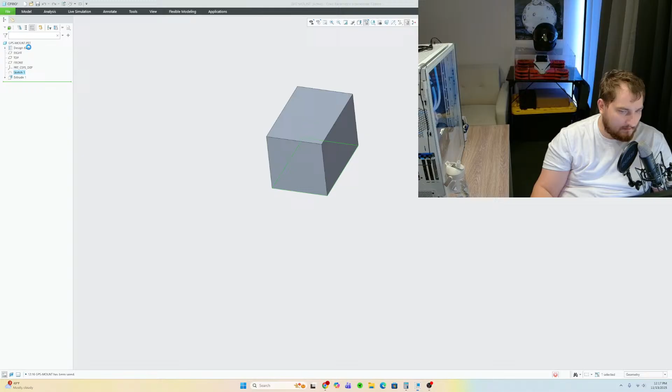And then it just has to be a little bit bigger than these guys, a little bit longer than these guys. 2 inches. 2.54 times 2 is 50. So let's do 60 long. It is 60 long. Let's do 70. I'm just kind of getting the dimensions right now, and then I'll mold it into shape.

But this guy needs to be constrained onto the flight controller. It's gonna be like yay tall. Analysis 0.7. Let's just say 20 more or 18 more. Plus 18. Okay.

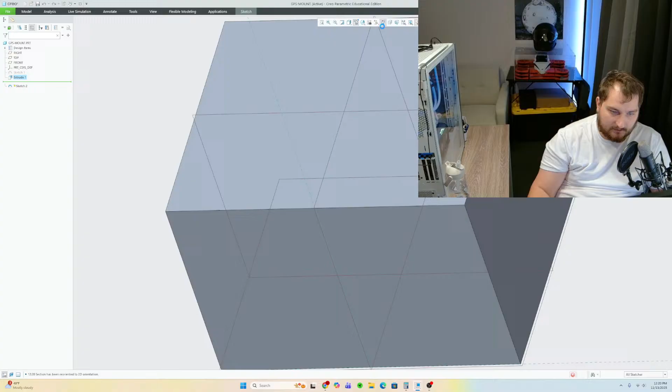Okay, and now we can create like a Pixhawk clamp sort of situation where these guys, this wall thickness is going to be 2 millimeters. Let's just call it 3. 2 might be a little bit thin. You know what? Let's do 4. I'm feeling froggy today. Let's do that.

So see, it's gonna sit over the Pixhawk, and then it's gonna be able to clamp the GPS on top of it. But I think I did this a little bit off. It was my first try. So let's do like 10 or maybe 12. Let's see how that sits. It could probably be like 16. And then we can literally create like that. Oh wait, no. Other way.

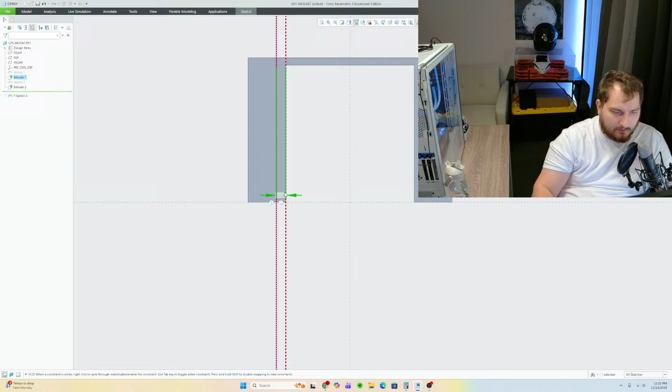You know what? Let's just start a new sketch. And then we're going to get rid of this. It's going to be 4. This wall thickness is going to be 4. This guy that's on the ground where the screws are going to be is also going to be 4. So we can get rid of all this, mirror it over that. Okay, extrude like that. Yes, perfect.

Now I'm gonna need holes right here. Analysis, 2 inches, 2 inches, 50.8 millimeters. Right there. 2.2.

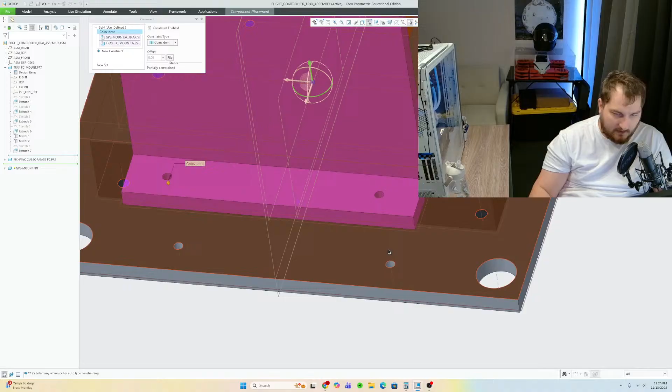So now this guy, I'm gonna unconstrain him and then see if these holes align. It's oriented right now. Hold on. Yep. You can see they clearly and precisely align. This guy's off. I wonder why that happened. Well, let's see how off it is from here to here. Measure 0.12. 3.24.

Let's unconstrain this. Constrain it onto here. Now what is it? You know, I think I could probably get away with just moving the holes over 0.063 inches. 1.62, this right here. What? Really? Yeah.